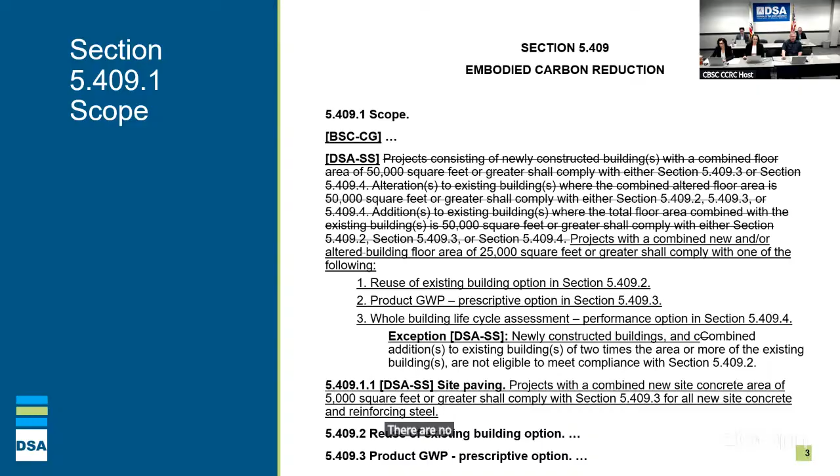There are no other hands raised. Moving on to table 5.409.3, this table presents the proposed adjustments to the GWP limits.

Under this proposal, the limits would be reduced from 175% down to 125% of the BCCA and NRMCA levels. I also want to note that these updated limits would be based on the 2025 BCCA values, whereas the current limits reference the 2022 BCCA values.

This proposed reduction to 125% is consistent with the proposal previously brought forward during the pre-cycle CCRC meetings in the 2025 intervening code cycle. That proposal was ultimately tabled following the passage of AB 130, delaying further consideration until the 2027 Triennial code cycle. Given this history and the later timing of the upcoming code adjustments, DSA is requesting feedback from stakeholders regarding the appropriate level of reduction moving forward.

Are there any comments on the prescriptive GWP limits at this time? If I could interject, we're going to have a public comment period towards the end of the presentation after the stakeholder presentations, so maybe we can hold off on public comments until then, per the agenda. Okay, just so the whole presentation is in front of them before they ask questions.

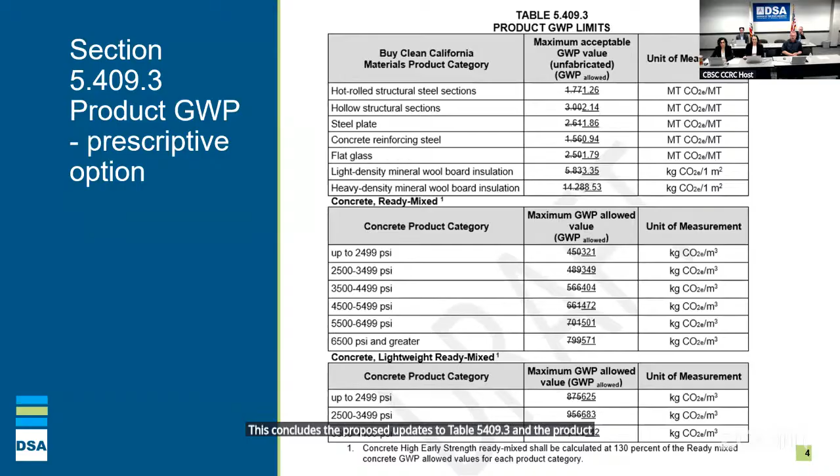Next is section 5.409.3.1, verification of compliance. DSA is proposing an exception that for DSA projects, the required DSA form for prescriptive compliance shall be submitted in place of worksheet WS5. This is because DSA has its own verification form included with the DSA 403C, and that form is required for all DSA regulated projects. As a result, worksheet WS5 in CalGreen is not used for DSA projects.

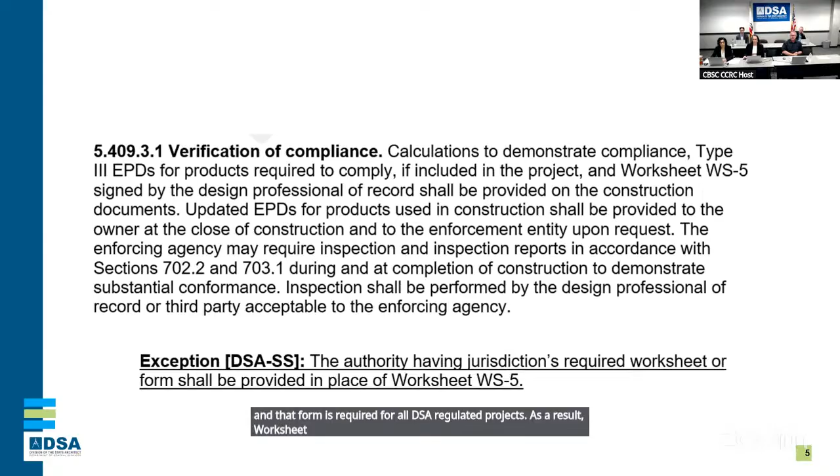Section 5.409.4 covers the whole building life cycle assessment performance option. The proposed revisions introduce a carbon budget as an additional pathway alongside the current baseline building method. The upcoming presentation by CLF will provide a more in-depth explanation of the carbon budget. As a note, DSA is seeking feedback on whether the carbon budget approach should eventually become the sole compliance method within the performance option, either in this code cycle or in a future one. This is an open question for stakeholders, and your input will help shape the direction of upcoming updates.

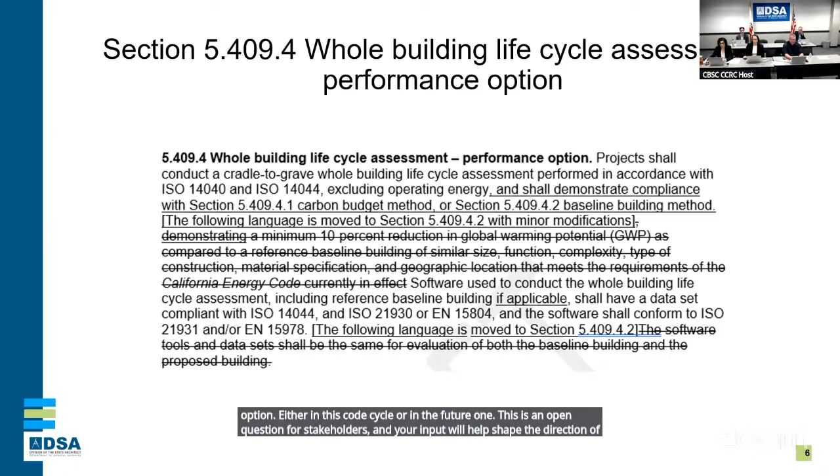Regarding the carbon budget, on the screen is a snippet showing how it is proposed to be integrated into the code language. Section 5.409.4.1 outlines the requirements for the carbon budget method, explaining how the embodied carbon intensity, ECI, is calculated, and introduces table 5.409.4.1, which lists the maximum acceptable embodied carbon budgets for each occupancy type.

You'll also notice that a significant portion of table 5.409.4.1, shown in red, has been revised since the draft posted on the BSC and DSA websites prior to the CCRC meeting. These updates were made in response to CLF comments submitted during the 2025 intervening code cycle. CLF emphasized that project teams should not perform an area-weighted average to determine a project's embodied carbon budget, nor should they combine multiple occupancy groups, because these embodied carbon budgets are already based on accounting for mixed-use types.

To address that concern, DSA proposes expanding the table to list each non-residential occupancy group separately and adding two footnotes. Footnote 1 clarifies that the primary occupancy group is the occupancy classification representing the largest percentage of the building's total floor area. Footnote 2 clarifies that a building's embodied carbon budget must be the embodied carbon budget associated with its primary occupancy group and must not be calculated using an area-weighted average of multiple occupancies.

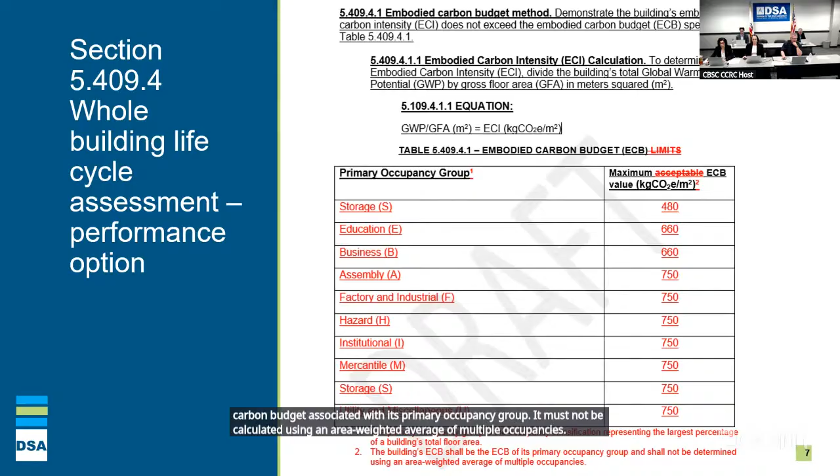We also have proposed new definitions for embodied carbon intensity and embodied carbon budget. I'll walk through each of these briefly. Embodied carbon intensity, ECI, is defined as the total global warming potential of a building divided by its gross floor area, expressed in kilograms of carbon dioxide equivalent per square meter. Embodied carbon budget, ECB, is defined as an embodied carbon intensity value that serves as the maximum allowable limit for determining a project's compliance with embodied carbon reduction requirements, also expressed in kilograms of carbon dioxide equivalent per square meter. These definitions support the carbon budget framework, which again will be explained in greater detail during the upcoming CLF presentation.

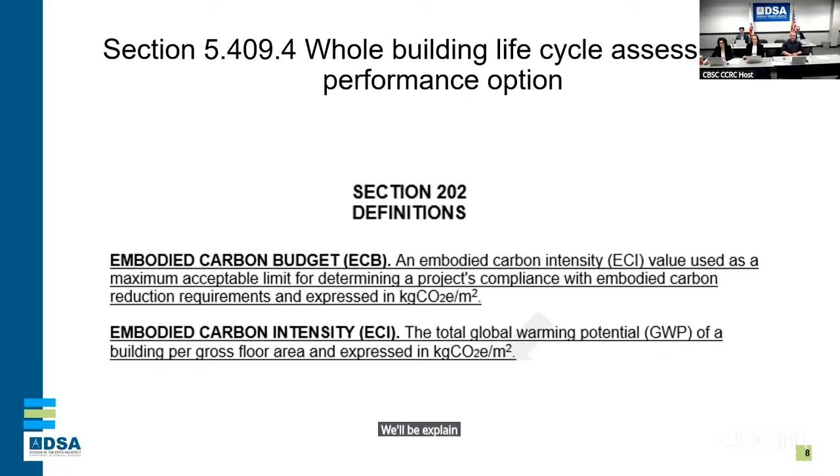And with the addition of the carbon budget, the baseline building method has been separated out into its own section, 5.409.4.2, which retains most of the existing language with only minor updates for clarity.

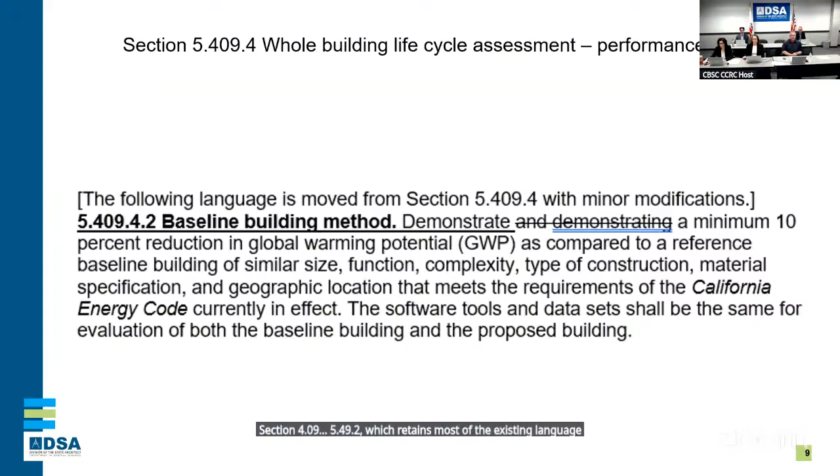Also within the whole building life cycle assessment performance option, DSA is proposing an exception to exclude biogenic carbon from the calculation. Stakeholders recommended clarification to ensure biogenic carbon is not counted as a reduction in the building's GWP, nor the base building model where applicable. The rationale is that biogenic carbon has a net zero contribution to global warming potential over the full life cycle of a building.

The proposed definition for biogenic carbon is greenhouse gas absorbed from the atmosphere by living organisms as they grow, and then released back into the atmosphere through natural processes such as decomposition, but not fossilized or derived from fossil resources.

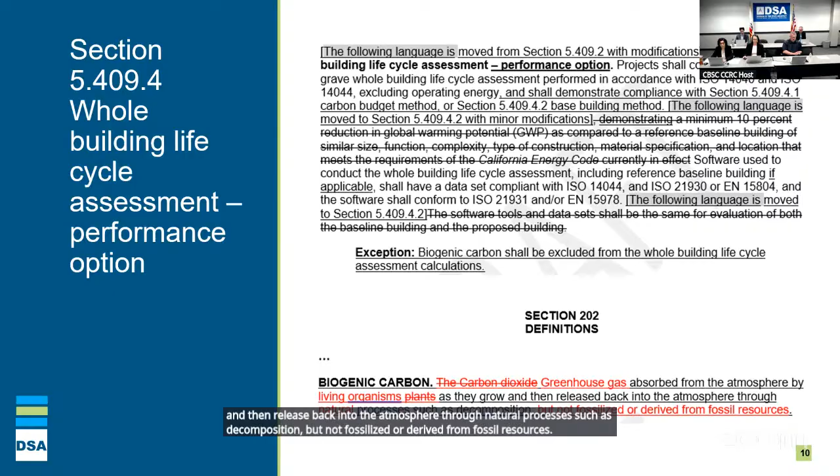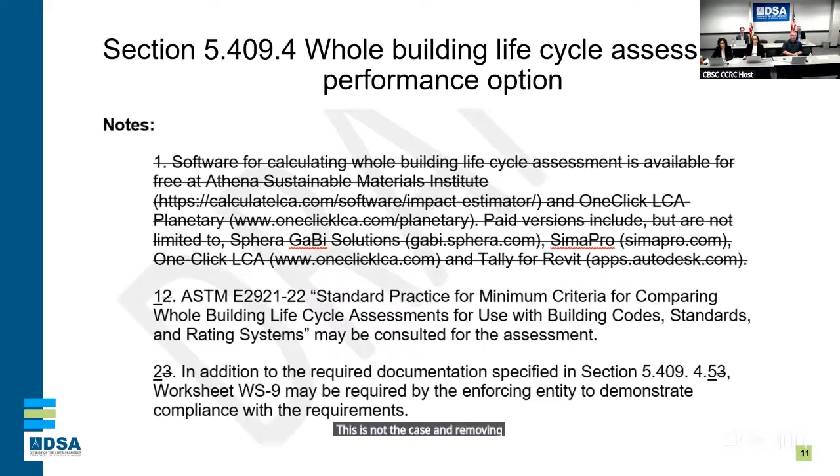Again, in section 5.409.4, DSA and BSC are proposing to remove note 1, which lists whole building life cycle assessment software available to the public. Although the note is non-regulatory, keeping it in the code text could unintentionally imply that the authority having jurisdiction endorses, has evaluated, or prefers the listed software over other tools on the market. This is not the case, and removing the note avoids any misunderstanding or perception of bias.

In section 5.409.4.3, building components, we are proposing a new subsection 5.409.4.3.1, which specifies that salvage materials and products shall have a GWP of 0 for life cycle stages A1 through A3. In other words, salvage materials do not contribute to the building's overall GWP calculation for those stages. This subsection also clarifies what qualifies as a salvage material, using criteria similar to the exception that will be included in the prescriptive option for the 2025 intermediate code.

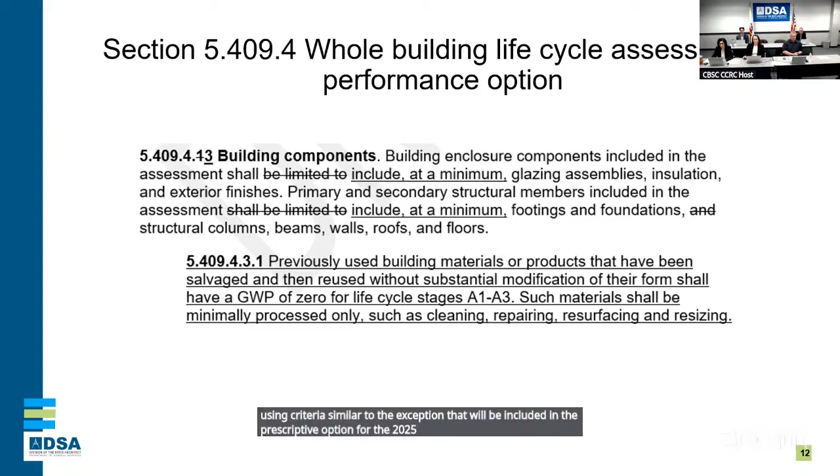Lastly, similar to the verification exception in the prescriptive method, DSA is proposing an exception in section 5.409.4.5 for verification of compliance. For DSA projects, the required DSA form must be submitted in place of worksheet WS4. This is because DSA already has its own verification form, including the DSA 403C form, and that form is required for all DSA regulated projects. As a result, worksheet WS4 in CalGreen is not used for DSA projects.

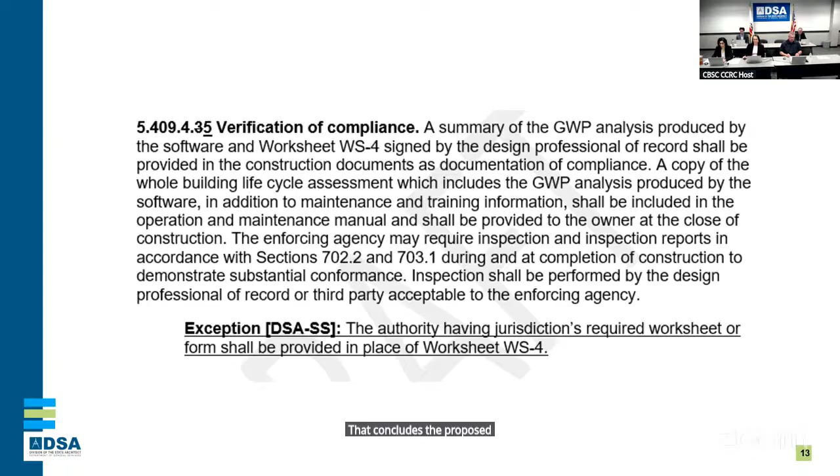That concludes the proposed updates for the whole building life cycle assessment performance option. And for that, I'll turn this back over to BSC. Thank you, Anna.

As DSA just presented, and as everyone can see in BSC's draft express terms, BSC does not propose any changes to the scoping provisions for embodied carbon regulations under our authority, and the threshold will stay at 50,000 feet for buildings within this authority. We're co-adopting the rest of DSA's proposals, again, except for the scoping provision changes and exceptions about worksheets that DSA proposes on their own.

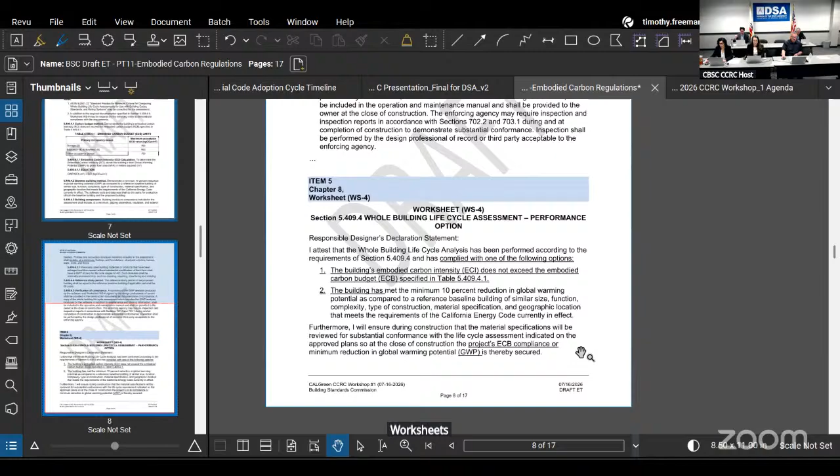I'll go ahead and present BSC proposals in voluntary sections that BSC or DSA does not adopt. As DSA had mentioned in their presentation, they have worksheets specific to their projects and will no longer be co-adopting the worksheets in Chapter 8 of CalGreen. Worksheets WS4, WS7, and WS9 are to be used with the mandatory provisions as well as the voluntary appendices. Each of these forms have been revised to reflect the embodied carbon budget compliance method.

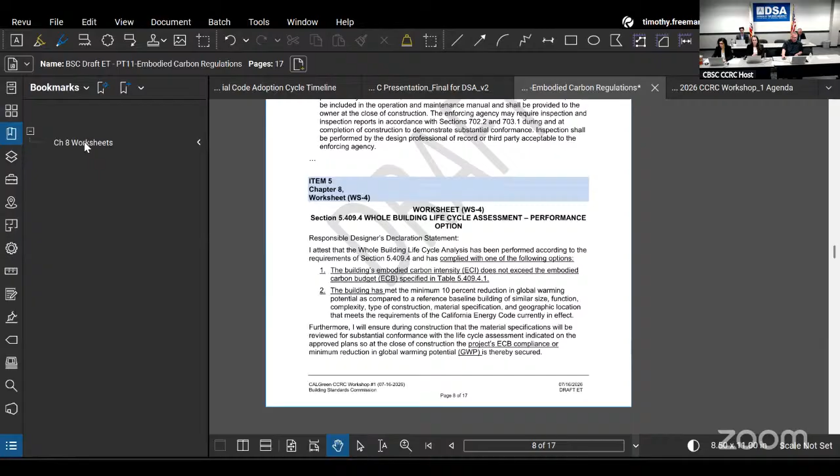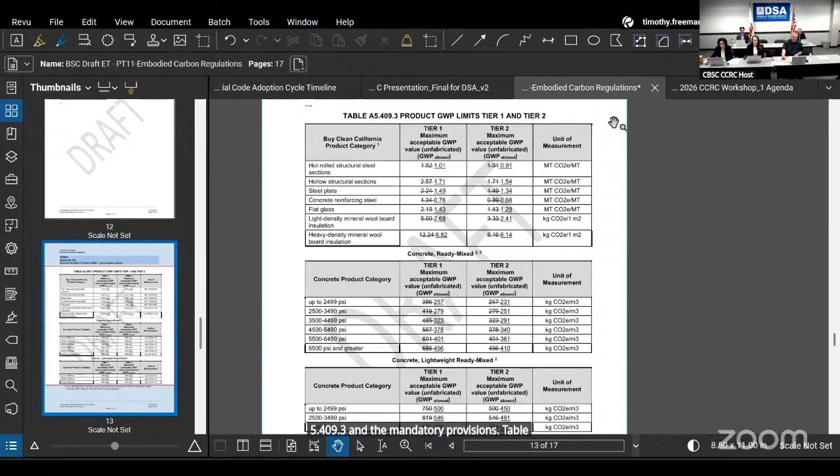Similar to table 5.409.3 in the mandatory provisions, Table A 5.409.3 in Appendix A5 has been adjusted to reflect utilization of BCCA GWP values for Tier 1 and Tier 2 voluntary measures. Tier 1 utilizes 100% of BCCA values, while Tier 2 uses 90% of the values.

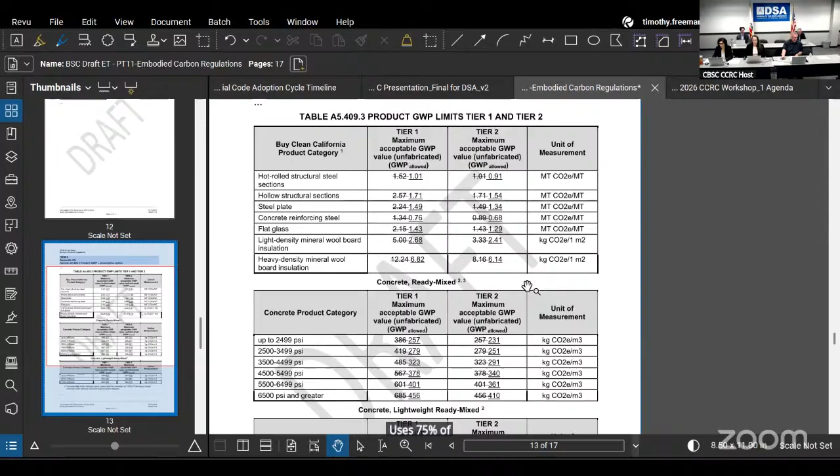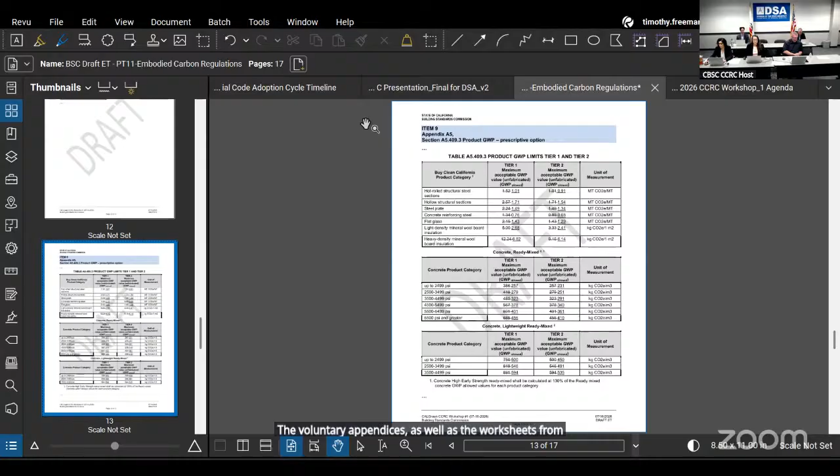That's the extent of provisions being proposed in the voluntary appendices as well as the worksheets from BSC. At this point, I'd like to continue to agenda item 3. DGS procurement has an update on BCCA levels.

Is somebody from procurement, yeah, I think it's Tony Wang, on the Zoom? Okay. Yep, can you guys hear me? Yeah, thank you, Tony, morning. I am working on sharing my screen.

All right, good morning everyone. My name is Tony Wang. I am the Senior Procurement Engineer with Department of General Services Procurement. I oversee the Environmentally Preferable Purchasing Unit, and so we work on the Buy Clean California Act as well.

So what is the Buy Clean California Act? The Buy Clean, or BCCA, states the Department of General Services, in consultation with the California Air Resources Board, is required to establish and publish the maximum acceptable global warming potential limits for 4 eligible materials. Those materials are structural steels, concrete reinforcing steel, also known as rebar, flat glass, and insulation. These limits apply to any projects conducted by a state department that is under the State Contracting Act. On the right, I've included the current GWP limits that were released January 1st of 2025. These limits are reviewed on a 3-year cycle, so we are due to update these limits on January 1st of 2028.

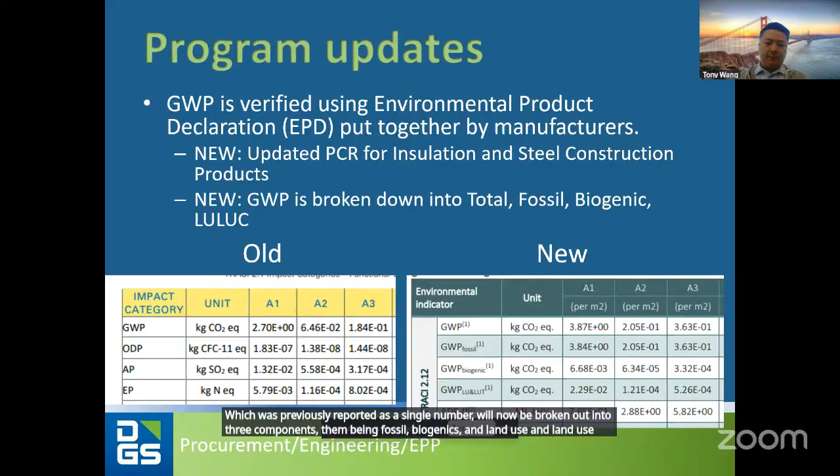In addition to those changes, we also had a change to the BCCA legislation. Previously we were only allowed to set limits for mineral wool board. This has been changed to a much broader insulation category. We're currently working on collecting data to set the new limits across a much larger product category, and we're planning on releasing that on the next update cycle on January 1st of 2028.

There's quite a few considerations that go into setting these limits. One is that with the recent PCR changes, a lot of the EPDs will be reporting cradle to grave instead of cradle to gate. Just within the insulation category, there's a lot of variation in the products, so we need a strategy for addressing differences in the GWP of facers, different densities of insulation, form factors, etc., as well as the PCR being reported in the EPDs.

Those are technically active for 10 years, so we want to make sure whatever limits we set account for both the PCR the EPD was written on and any new EPDs that come out written on a newer PCR. So that's the update for us on the BCCA program.

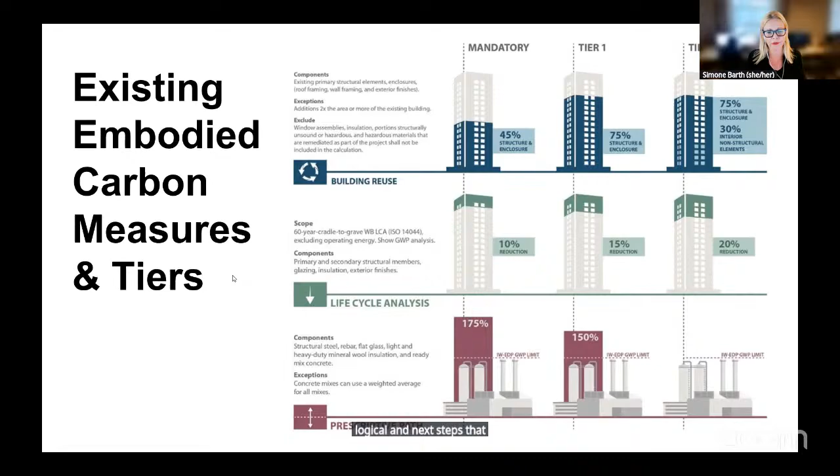So when we're talking about the triennial update, we like to suggest logical next steps that support the state of California's overall goals in reducing greenhouse gas emissions. We think the 2024 measures were successful, and the industry adopted it based on feedback received. The success was in the choice offered to the design professional—the 3 compliance paths—as well as the fact the requirements were relatively achievable. So this is an interesting point to continue our journey towards reducing overall greenhouse gas emissions, but also creating resilient and sustainable buildings.

Our recommendations are organized in 4 categories today that will be presented by our subject matter experts. Number 1 is embodied carbon compliance and potential adjustments to the prescriptive path. Number 2 is introducing an embodied carbon budget as an alternative compliance method. To be clear, we are not changing the 3-path model approach—this is just an alternate.

Number 3 is the circular economy, getting CalGreen up to date and supporting the overall reduction of greenhouse gas emissions and waste, while also promoting economy. And last but not least, there's a slight typo here, is CalGreen cleanup—as we add more materials, we think it's important to prune the tree and make fine revisions. With this, I'd like to introduce our subject matter experts who will go into detail on these 4 recommendation areas, and I'll call up Maya White to cover embodied carbon compliance.

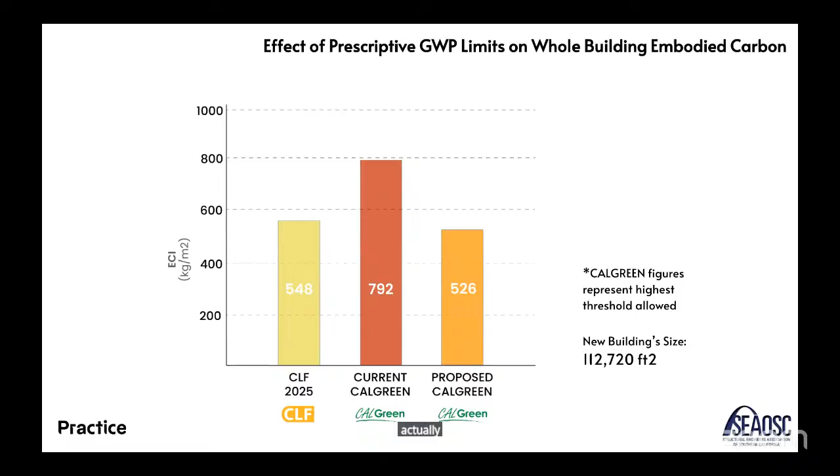So here are the actual GWP limits that we're proposing for the mandatory tier 1 and tier 2 levels: 100%, 90%, and 85%. It's broken down by each material type per BCCA. As insulation expands beyond mineral wool, we'd also advocate expanding standards for the prescriptive path limitations to align with the different categories included for insulation.

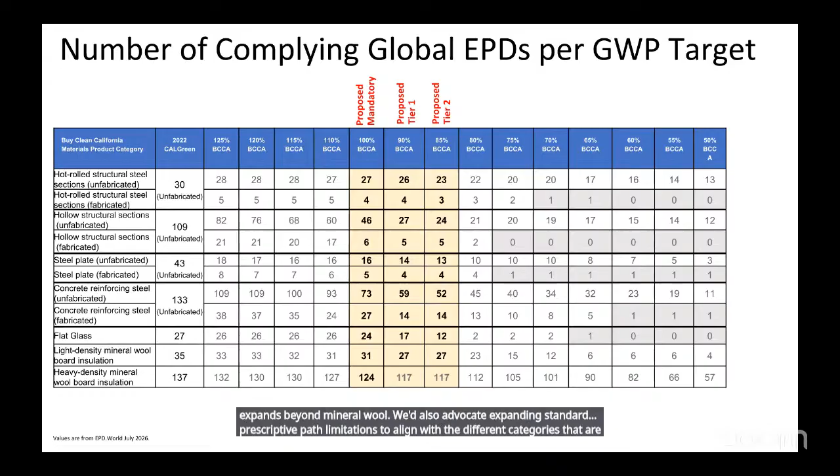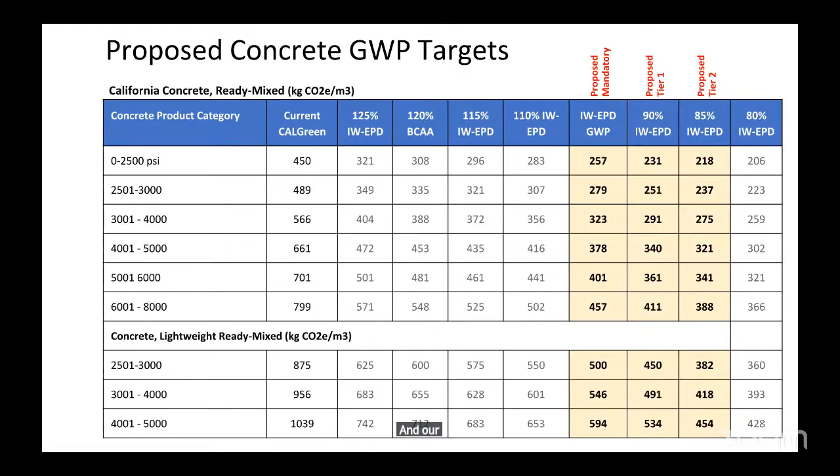Next slide. Here you can also see that we are proposing limitations on concrete that are in correspondence with average concrete values as shown in CLF reports and also in our NRMCA standards. Again, 100%, 90%, and 85% for mandatory tier 1 and tier 2. Next slide, please.

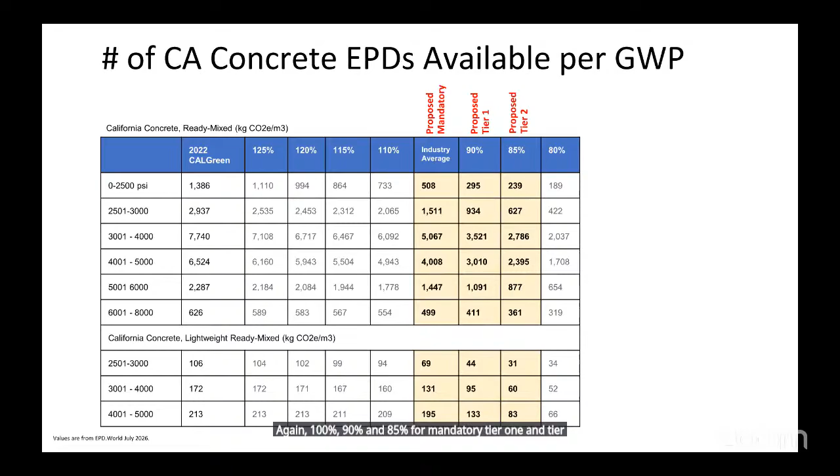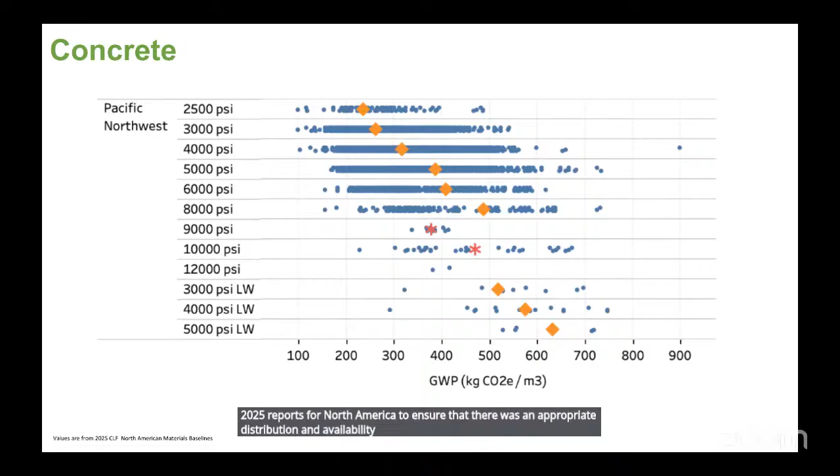We looked at each material type and compared it to CLF's 2025 reports for North America to ensure there was an appropriate distribution and availability of EPDs on the marketplace that consumers, architects, and contractors could turn to for material supplies. We found there was a more than adequate distribution for each product type.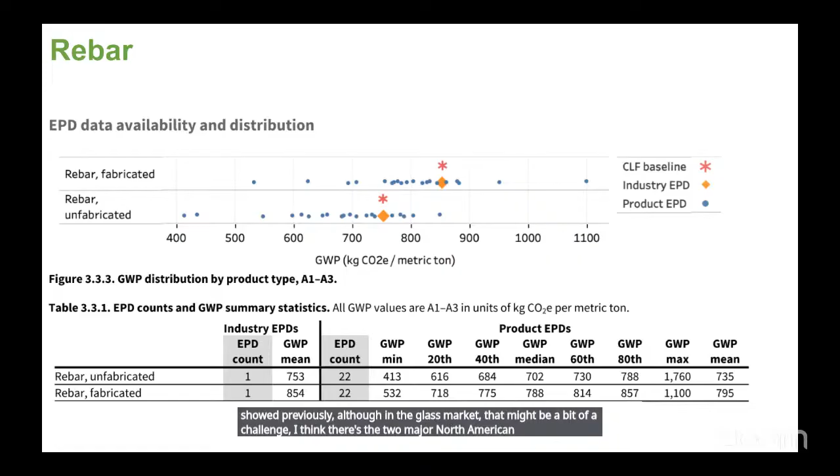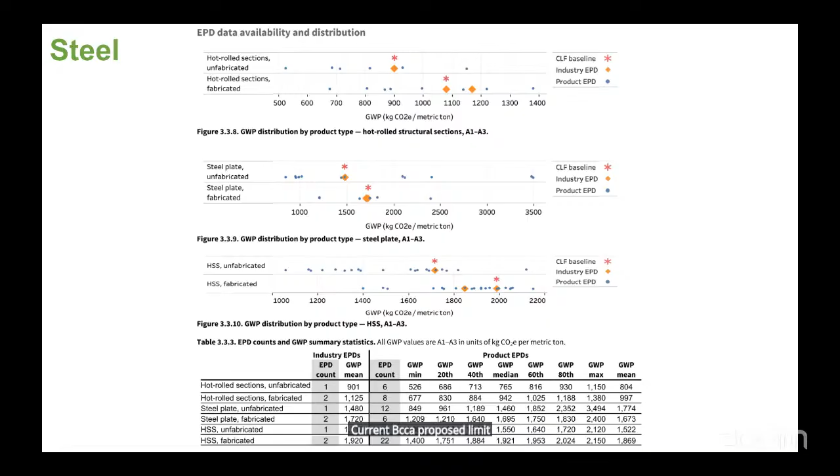We support going to 75%, I think, for tier 2, as BSC showed previously, although in the glass market that might be a bit of a challenge. The two major North American suppliers come out at about 87% of the current BCCA proposed limitation. So for that, we made a minor deviation on glass to allow the two major manufacturers to still be considered.

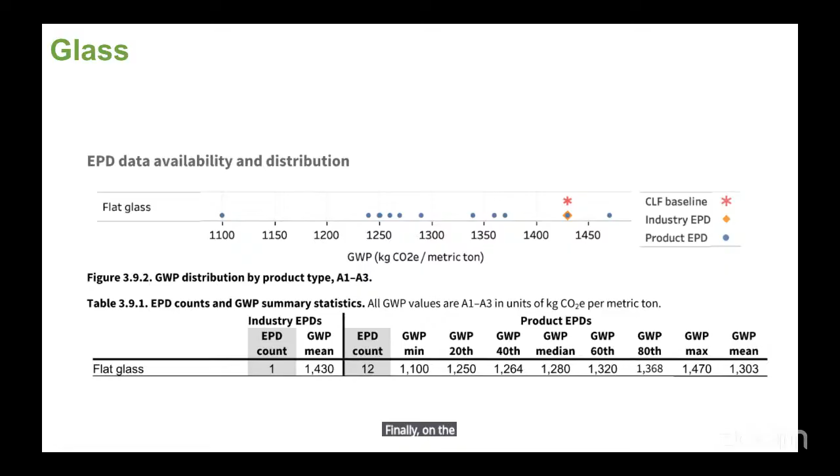Next is Brad Benke with the Carbon Leadership Forum.

I'll be sharing some of our proposed approach for the embodied carbon budget pathway that's been mentioned a couple times already. So there are 3 current pathways: the building reuse pathway, where you simply show you've reused 45% or more of a building; the prescriptive path, where you're using lower carbon products verified by EPDs; and the current performance path, which has you conduct a whole building life cycle assessment on both a baseline and proposed design to show a percent reduction.

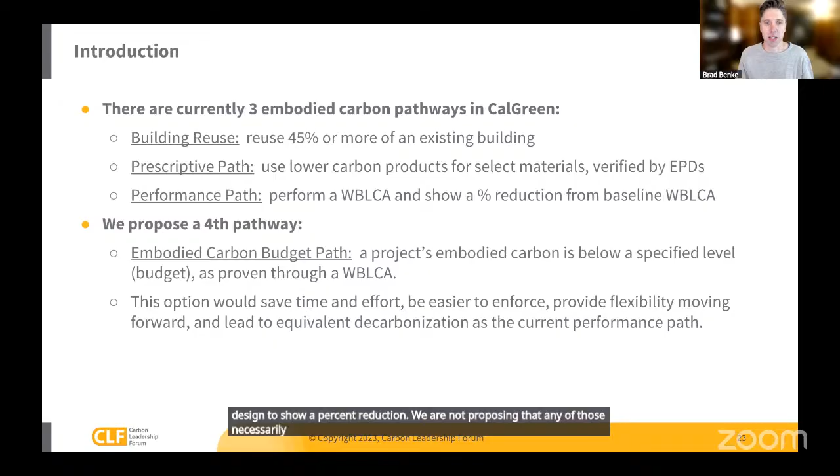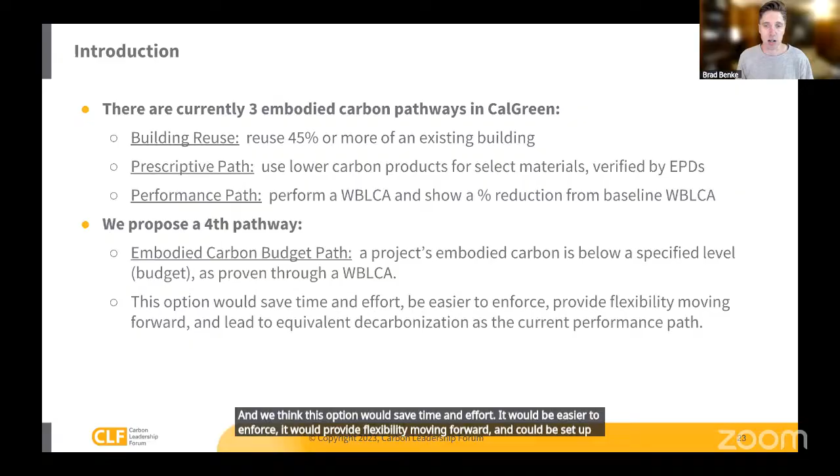We are not proposing that any of those necessarily need to change, but we are introducing a 4th optional pathway called the embodied carbon budget approach. This would be where a project's embodied carbon intensity must be below a specified level or budget as proven through a whole building LCA. We think this option would save time and effort, be easier to enforce, provide flexibility moving forward, and could still lead to equivalent decarbonization as the current performance path. Next slide, please.

So embodied carbon budget is a maximum allowable embodied carbon threshold value for compliance. Typically, this is expressed as an embodied carbon intensity of a building, measured in units of kilograms of CO2e per meter squared.

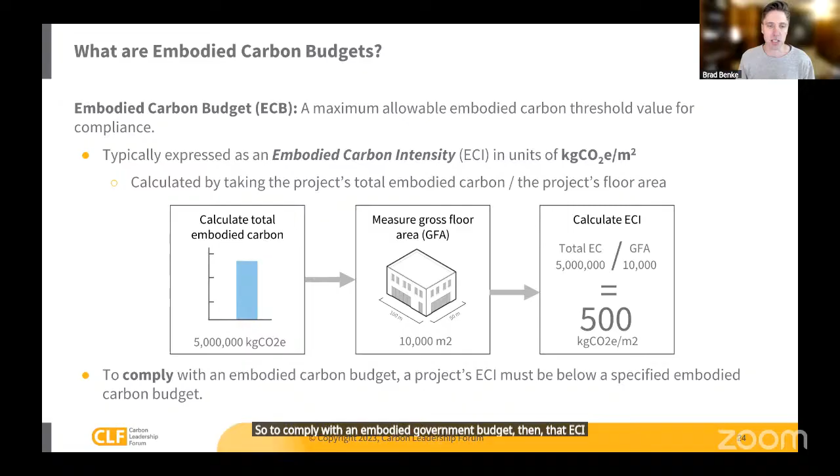So how you actually calculate this embodied carbon intensity metric is you perform a whole building life cycle assessment on your project, find out its total cumulative embodied carbon impacts, measure the floor area of that same project, and divide those two numbers. So in this case, 5 million divided by 10,000 would be 500 kilograms CO2e per meter squared, or ECI building. To comply with an embodied carbon budget, that ECI number must be below a specified budget.

How this would actually work is a project would calculate their ECI and compare it to a predetermined budget that we have suggested values for in the following slides, and see if they already comply, or if they must reduce their impacts in order to comply.

So in this case, buildings A, C, D, and F all calculated their ECI, and it was below whatever the set value is. Whereas projects B and E looked at their results and said, we need to reduce our embodied carbon further to meet this target.

By doing so, those projects that are over the embodied carbon budget and make reductions to meet it are then creating a net embodied carbon reduction across the policy across California.

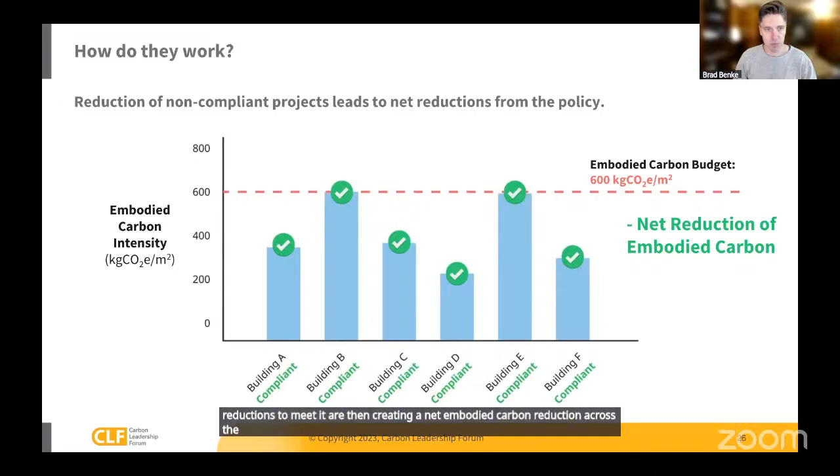The benefits of this option are simple. In the current performance path or baseline design approach, project teams have to create two different whole building life cycle assessments, one a hypothetical baseline, the other their actual proposed building, and show that the proposed building is lower than the baseline. We completely eliminate the need to create that baseline whole building life cycle assessment model, which saves everybody time and money and is much easier to review.

This also helps because if projects already have mid to low impacts inherently, whether they've intentionally or accidentally created a lower carbon building, they're not required to reduce those impacts any further.

It's also clear and predictable. Project teams can know exactly what the embodied carbon budget value is that they need to meet early on in design, and the method itself does not need to change over time, saving on training and retraining.

However, it's also flexible and forward-looking. Once you have this framework in place, if you would like to make these targets more restrictive over time, it's easy to adjust them to align with whatever global climate targets, state climate targets, or code adoption climate targets might exist.

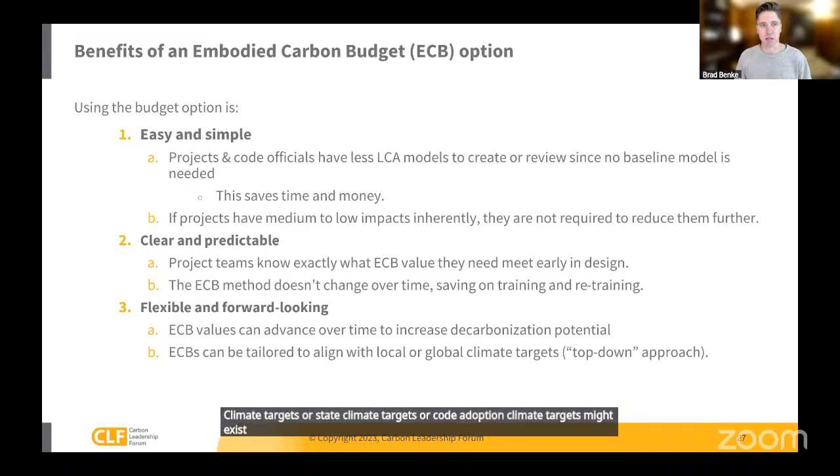The data that we're using to create values for the CalGreen recommendation comes from our whole building life cycle assessment benchmarking study that we completed last year in collaboration with the University of Washington. This had over 200 whole building LCAs of real world projects from late design to construction. We had rigorous modeling and reporting requirements and data quality assurance checks, and it's the largest and actually the only database containing comprehensive and high resolution whole building life cycle assessment results of real world projects in North America.

This data set was not available when CalGreen introduced the embodied carbon pathways in 2024, which is why it's now being introduced as an option, because we did not have sufficient data to be able to say what accurate or meaningful embodied carbon budgets would have been for those projects at that time, but we do now.

The way we're proposing that different types of buildings have different embodied carbon thresholds or budgets is based on primary occupancy category, which is the occupancy type that makes up the greatest share of a project's total gross floor area. Primary occupancy is recorded on all architectural drawings submitted for code, so this is an easy way for code officials to pair appropriate embodied carbon budget targets with the building typology.

The values that we're proposing at the required level are the 75th percentile of the data points for projects of equivalent types. More on that in the next slide. Tier 1 and tier 2 values can also be introduced to align with the baseline design pathway reduction potentials, and we have a methodology for doing so.

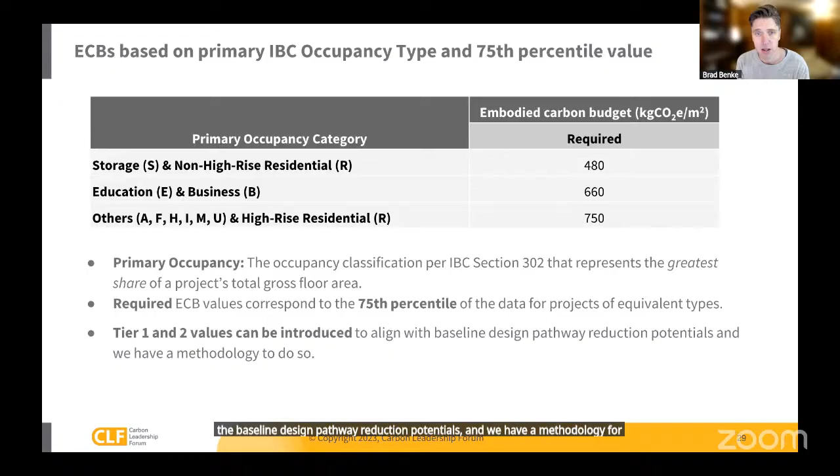So the 75th percentile, the way we chose that number is: if you were to quantify all the projects in our data set and say what would happen to each of these projects' embodied carbon intensity if we were to cap it at a certain value, where ones higher than that value have to reach it, and ones already below stay the same, we found that the 75th percentile of the data set creates an almost exact equivalent total net reduction of those projects as the current 10% reduction for the baseline design approach.

As indicated here, there's also potential tier 1 and tier 2 values where we can closely match a 15% and 20% reduction as needed for additional values. Also worth pointing out, the 75th percentile means 75% of projects on average are already going to be below that threshold. So we think it's helpful to consider that certain people adopting this option might want to make it more stringent, and we could provide values for that.

Also, no matter what the performance path reduction is set to, if the baseline design performance path values were to change, we can create similar outcome reduction targets using this data set.

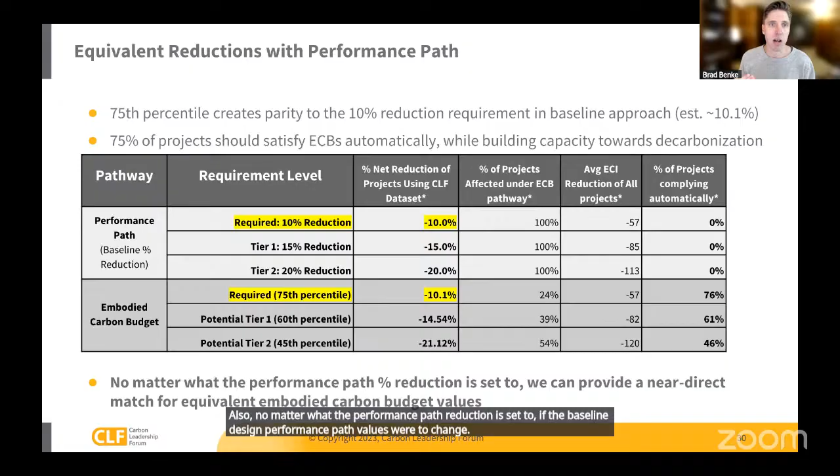To summarize, we think these recommendations are appropriate because they align with the intent and application of the current performance pathway. They utilize the best available data for embodied carbon impacts of projects in North America. This incentivizes net decarbonization in parity with the current baseline design approach. They're achievable with minimal effort for the majority of projects, easy to understand and verify for both project teams and code officials, saving time, effort, and money compared to the baseline design approach. Lastly, these can easily be updated and improved over time without changing the overall process or framework, and this does not replace any current pathway, just adds flexibility and ease.

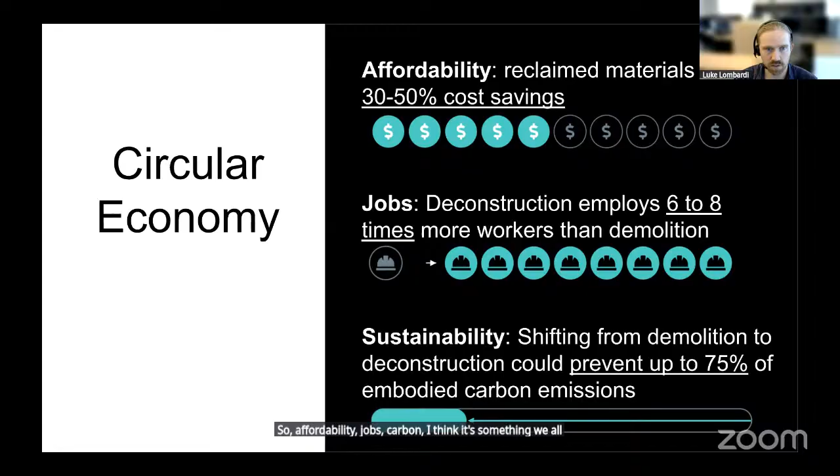Next slide. And we're seeing this develop with policies across the country, so it's not a novel idea here. You can see mandated deconstruction in places like Boulder or San Antonio, deconstruction or salvage audits in New York City guidance, Washington State allows lumber reuse, and ICC has recently brought reused lumber into the code for 2027. So there's a lot of precedent - the point is that we can pull from and set best practice here in California.

So what we are recommending is really in three groups here. First is foundational, where we want to add some definitions to enable or make consistent some of the other recommendations. We have some clarifications that we want to make clear within the prescriptive and performance pathways that enable reclaimed or reused materials. And then we have some broader discussion topic items around what precedents we can pull from across the country that could be good starting points for our own REACH code. So we'll get into that.

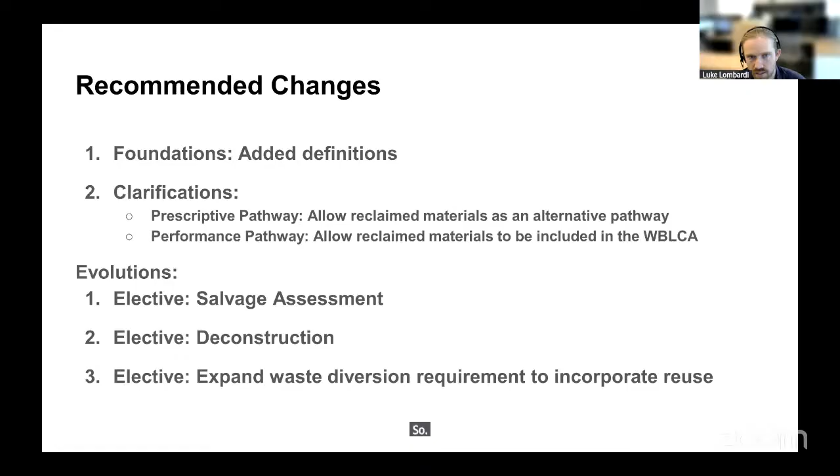Next slide. First off, with the definitions, I think there's not too much to be debated here. There's plenty of precedent to pull from now, from groups like LEED or ISO or other standards. There's sometimes conflated terms in the circular economy sphere around reuse or recycling and what we're defining, so it's important that we get these documented and written down so people are working from the same definitions.

Simone, looks like it froze on my end. My apologies, just give me a moment please. Sorry. I can dive into it just to keep things rolling here.

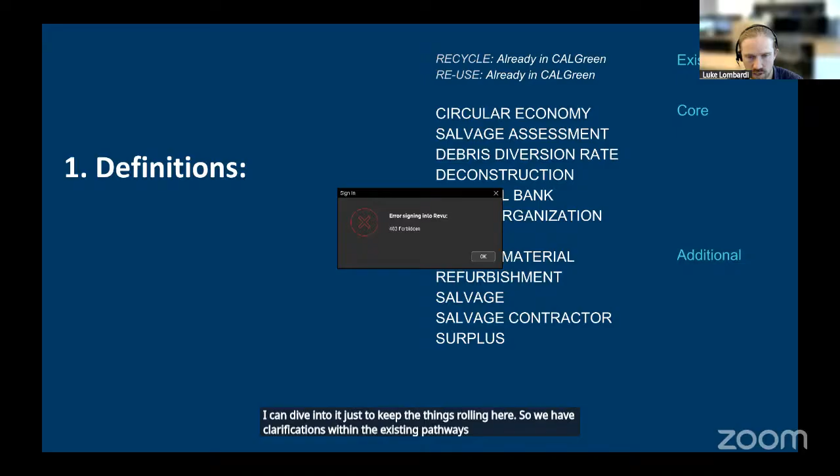So we have clarifications within the existing pathways for allowing salvaged materials. The pitch around this is thinking of salvage as sort of near zero carbon. This is certainly not, in fact, the true definition - there's a heavy asterisk around this because there are still carbon emissions whenever we have to transport or remanufacture things, but we know them to be, generally as a first principle, lower than new materials.

So the idea being, in the prescriptive path we waive the EPD requirement, and in the performance whole building LCA, we allow for omission of manufacturing emissions for A1 through A3 as a simplification, while there's some lag time for data around reused material EPDs to develop. So still incentivizing this pathway and not holding it up because of some technicalities.

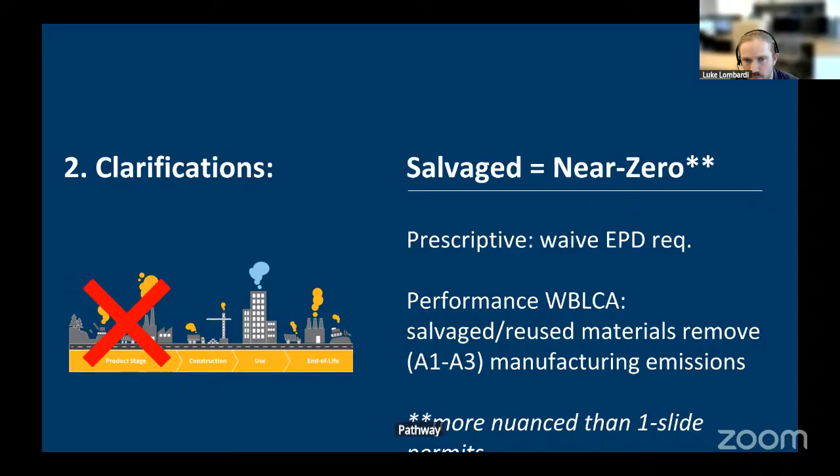So the last three here are just as a starting point. The first is recommending a salvage audit. This is something that has started to be required at the municipality level in certain places, where effectively you walk the building site that's being demolished and catalog the products that are available. The idea is you can make these public so they could be reclaimed or used. It's a first step to know what materials are being demolished or could be made available. Critical to this is the documentation piece and making a visible reuse market, but it stops short of requiring deconstruction.

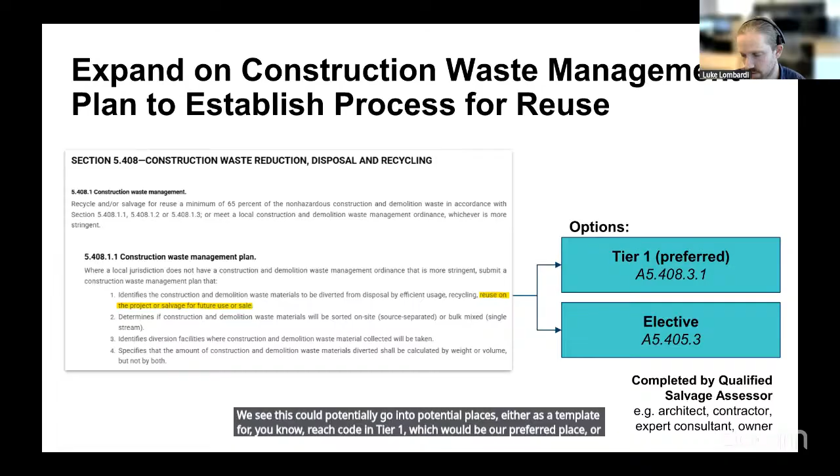So next step, we see this could potentially go into reach code in tier 1, which would be our preferred place, or as an elective, which would make it optional at any time.

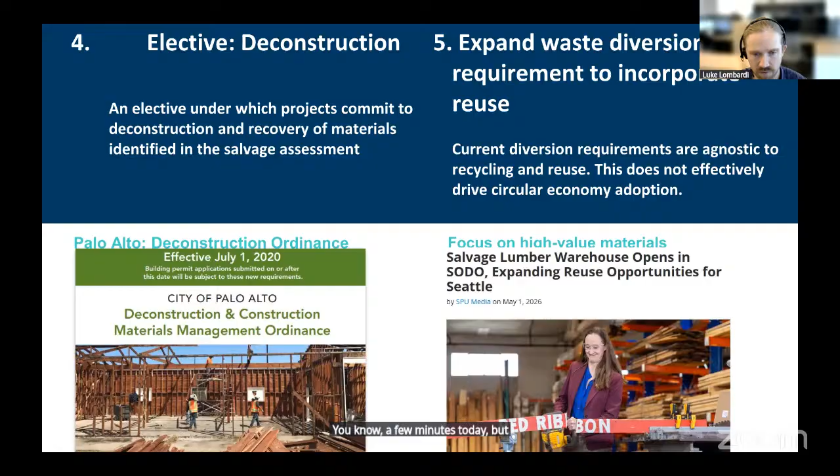Next slide, I'll hop to the second recommendation, which is the next progression of this. Once we establish the materials that could be deconstructed, the two things we want to do in parallel are actually require some deconstruction — there's precedent set at the local level — but it's important not just to drive the supply of those materials, but also the demand. So we're recommending an expansion of waste diversion to discern between reuse and recycling rather than be agnostic. There's a lot to discuss here, more than we have time for today, but that's a starting point.

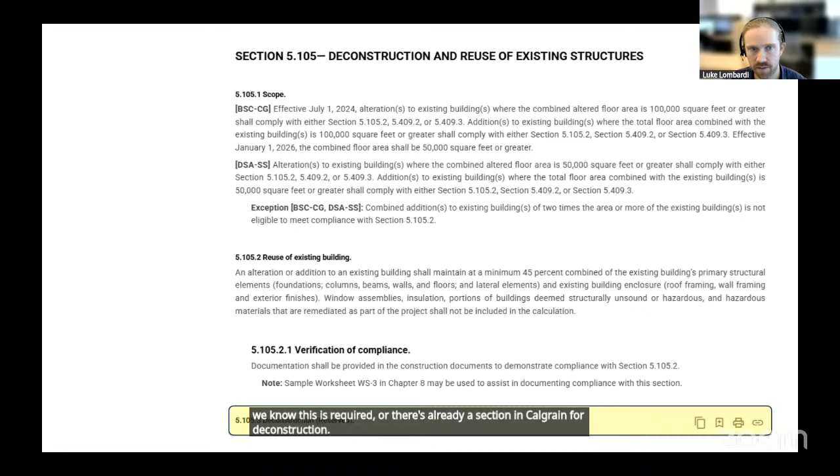I think we know this is required—there's already a section in CalGreen for deconstruction. We're just imploring the group to start that process. And I think that's it.

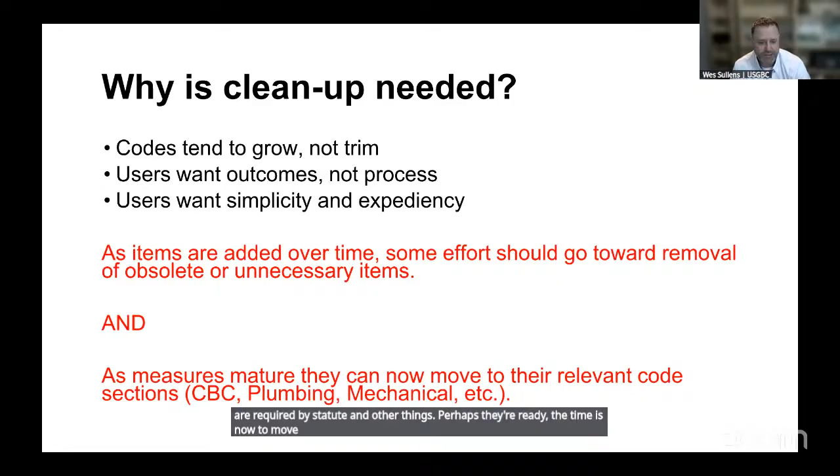So as items are added over time, we think there should be an effort to trim obsolete or unnecessary items, as well as measures that are now mature and required by statute and other things. Perhaps the time is now to move them to other code sections where they might be more relevant, such as the California Building Code, plumbing, etc. This is not a backtracking — we're not saying cut these things out of the codes at all. On the contrary, it's making space for newer high priority items, especially around embodied carbon, and we can make room for some of these urgently needed updates by refreshing CalGreen.

I see in the last intervening code cycle that there's already a little bit of this work done, which is great — we're happy to work with you on more. There are some examples on screen of things we might consider simplifying or streamlining, and again moving things to other code sections if possible, like water conservation fixtures to the plumbing code, and filter requirements to the mechanical code, etc.

And we have a table of some suggested things. We're going to refine this into a top 10 or 15 list, and would love to work with the state agencies on these priorities for making room in the code for these great embodied carbon updates. That's it for me.

Thank you, Wes, and thanks to my fellow co-presenters. Just a quick reminder of our four recommendations: adjustment to the prescriptive path in the embodied carbon compliance, introducing the embodied carbon budget as an alternative, introducing circular economy, and the CalGreen cleanup. And with this, I'd like to hand it back and open it up for questions. Thank you.

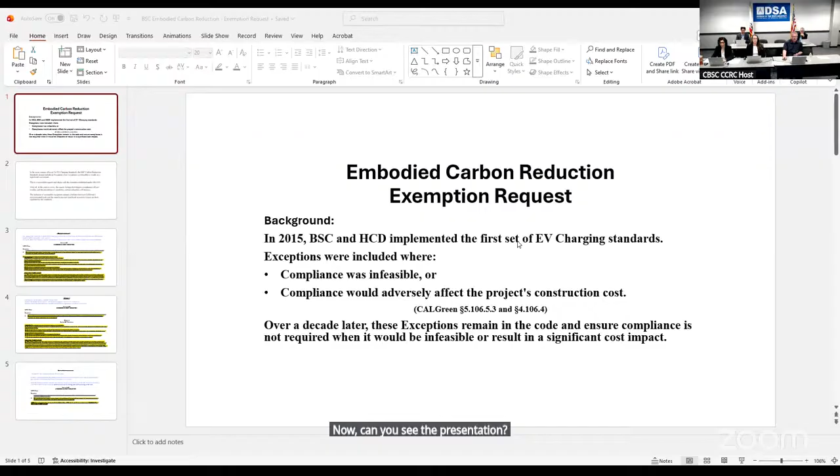Okay, by way of introduction, I'm Bob Raymer. I'm representing the Industry Coalition, made up of 4 associations: the California Building Industry Association, the California Apartment Association, the Building Owners and Managers Association, and the Business Properties Association.

What we're asking for here is an embodied carbon reduction exemption request. It may not be all that important right now, but down the road, it certainly will become important.

By way of background, AB 1092 was the Levine legislation that required both the Building Standards Commission and HCD to develop and implement the first set of EV charging regs. Those took effect in 2015, I believe in July, and they included exceptions for when compliance was infeasible or when compliance would adversely affect the project's construction cost.

Over a decade later, these exemptions still remain in the code and ensure compliance is not required when it would be infeasible or result in significant cost impact.

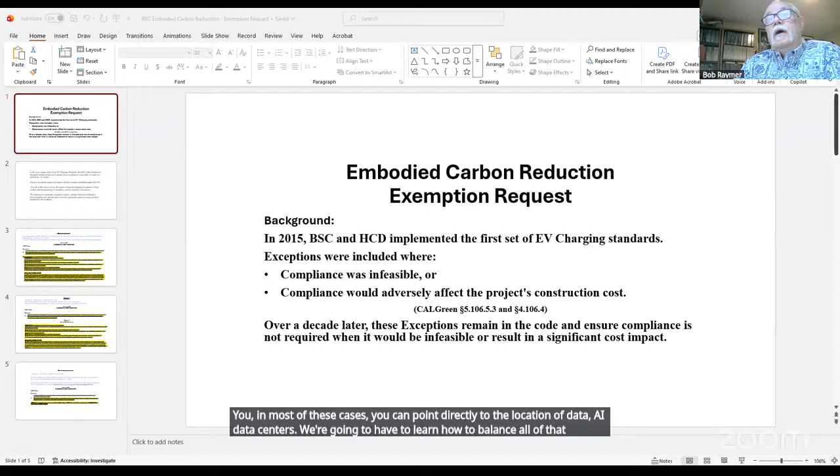I'd like to point out that initially, when HCD had the 3% rule, where 3% of multifamily parking spaces had to comply, this wasn't used, quite frankly. However, now that we're effectively at a 100% level for multifamily, we are running into instances where the local jurisdiction cannot supply capacity. In most of these cases, you can point directly to the location of AI data centers. We're going to have to learn how to balance all of that stuff out. But down the road, 10 years later, it was important that they were there.

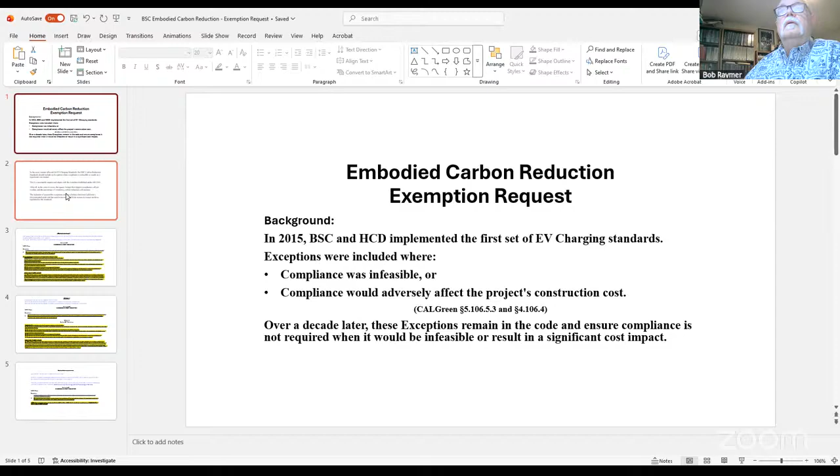In the same manner allowed for EV charging stations, we feel the BSC carbon reduction standard should include an exception, once again, when compliance is infeasible or would result in significant cost impact.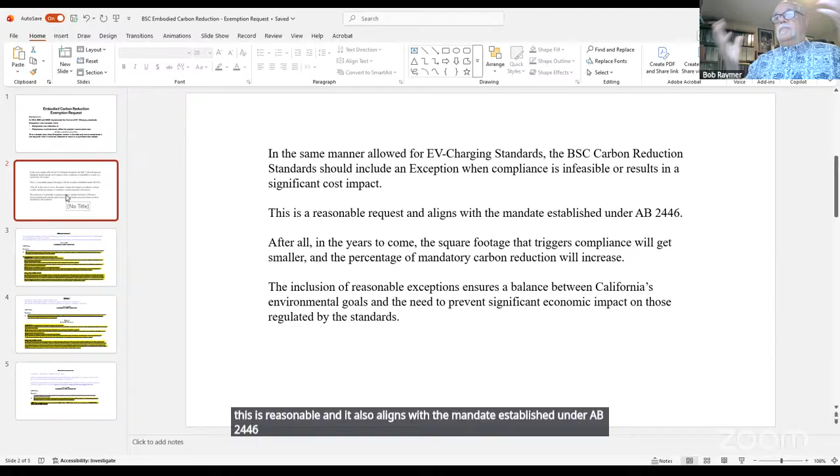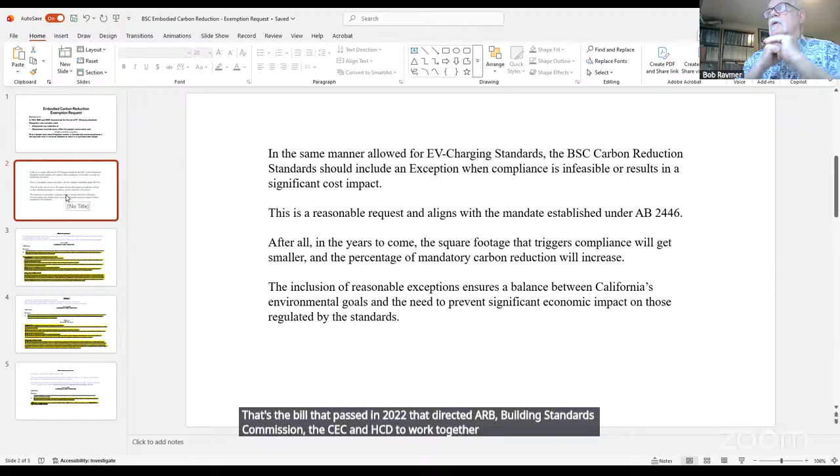We feel this is reasonable and it also aligns with the mandate established under AB 2446, the bill that passed in 2022 that directed ARB, the Building Standards Commission, the CEC and HCD to work together to come up with a framework for doing what we're doing.

In years to come, we feel that the square footage trigger for embodied carbon reduction is going to get smaller. Right now it's at 50,000, down from 100,000, and it's probably going to get lowered further, just as the percentage of mandatory carbon reduction is most likely going to increase. So we feel the inclusion of reasonable exceptions ensures the balance between California's environmental goal and the need to prevent a significant economic impact on those regulated.

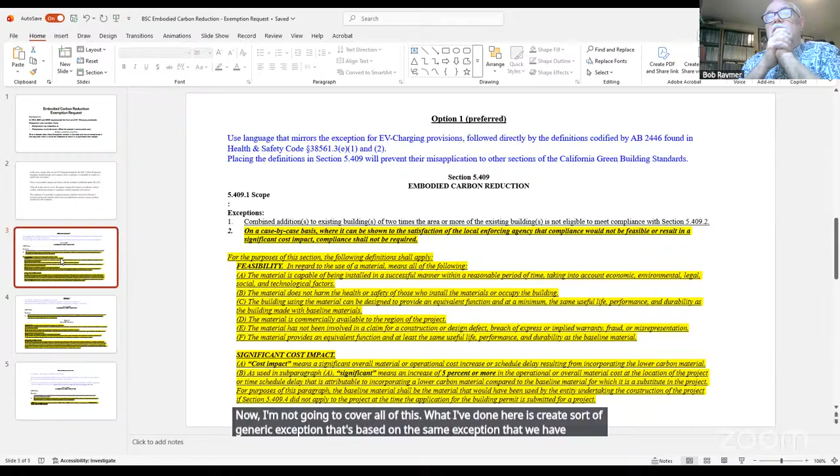Now, I'm not going to cover all of this. What I've done here is create a generic exception based on the same exception we have for EV charging, on a case-by-case basis, where it can be shown to the satisfaction of the local enforcing agency that compliance would not be feasible or would result in a significant cost impact. Compliance would not be required.

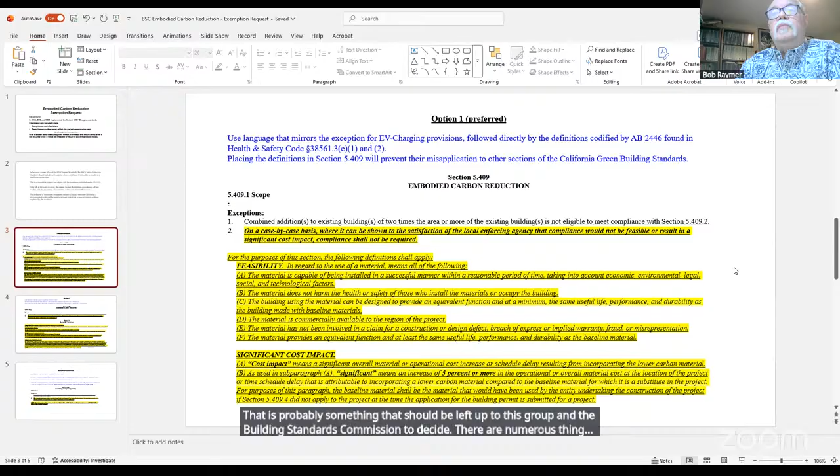In addition, I've added in this particular one the definitions out of AB 2446 for feasibility and for significant cost impact. I can tell you, as a longtime code user, these are ridiculously long definitions. I didn't want to take liberty with the content of AB 2446 - that's probably something that should be left up to this group and the Building Standards Commission to decide. There are numerous things here that could be consolidated, reduced, or worded differently, but I just wanted to present to the group, this is effectively the definitions out of 2446.

Now, in this option 1 that I've given, the benefit is that it has the definitions immediately following the exception. That way, these definitions can't be misinterpreted as applying to all of Cal Green. It applies to the embodied carbon reduction provisions.

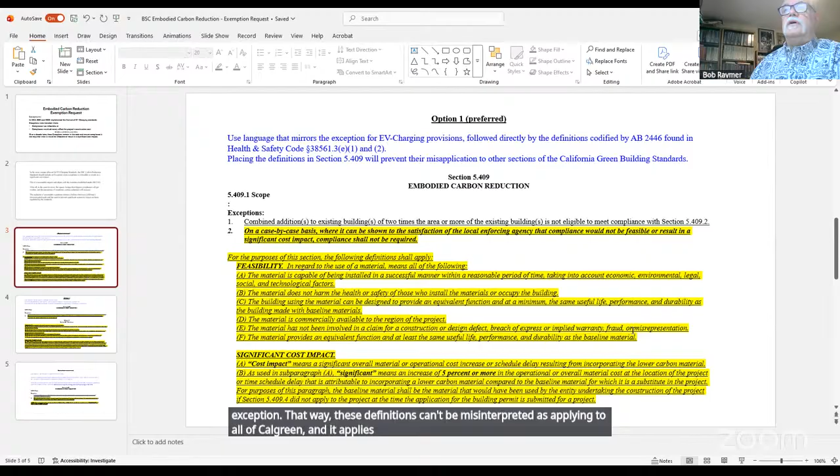Now, in the next one, option 2, which we would prefer less, we have the same language for the actual exception, but this time the definitions of feasibility and significant cost impact are placed in Chapter 2, Section 202, where we keep all the definitions. The downside of that is, once again, these could be misconstrued to apply to all sorts of stuff in Cal Green, not just the embodied carbon.

And lastly, the third option, which is absolutely the least preferred, we have the same exception language on a case-by-case basis, et cetera, et cetera. And then we have a note saying, for the purposes of this section, see Health and Safety Code, section 38561.3, E1 and E2, for the definitions of feasibility and significant cost impact.

While accurate, as a code user, it's horrible when the state tells you to go look at the public resources code, the water code, or in this case, the health and safety code. Building officials and code users don't carry the statutes around. But these are different options on how to deal with this.

Now, given the application of the EV charging standards, there's certainly going to be a lot of blowback on this. I'd like to state that the legislature and the governor wanted these agencies, the four that I mentioned earlier, to set up the framework for embodied carbon reduction, including a certified assessment of embodied carbon, a series of mandatory reductions in embodied carbon content over a reasonable period of time, to get the state to where it needs to be to meet its goals. And lastly, it included reasonable guardrails that I'm suggesting here that provide an exception when compliance was either infeasible or resulted in significant cost impact.

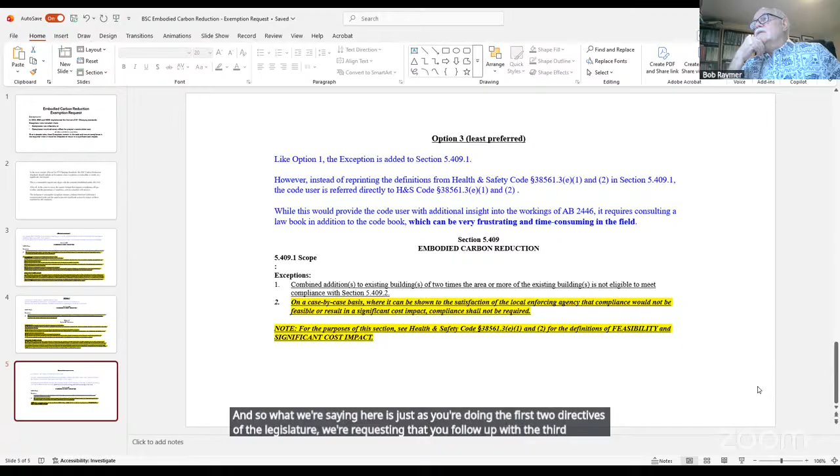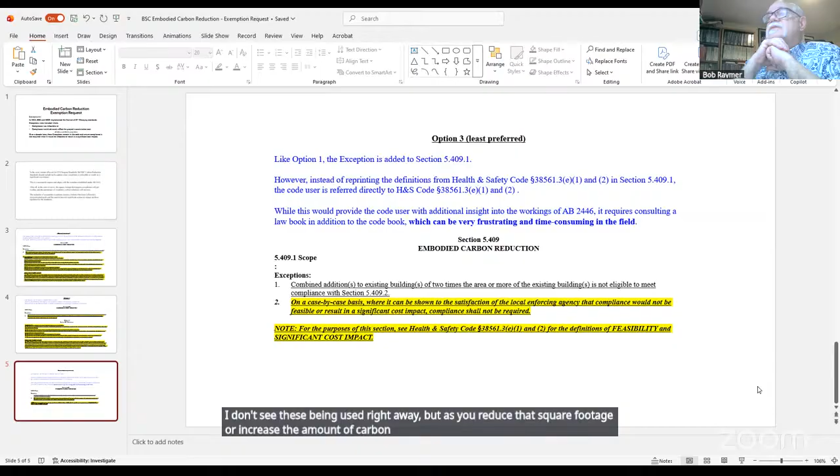In our view, if the BSC had adopted a regulation that only required a certified carbon assessment, but did not include a mandate to reduce the building's embodied carbon, numerous groups would have been rightfully upset. So what we're saying is, just as you're doing the first two directives of the legislature, we're requesting that you follow up with the third and set up some guardrails. Once again, if you maintain the square footage at 50,000 and the reduction at 10%, I don't see these being used right away. But as you reduce that square footage or increase the amount of carbon reduction, this is definitely going to play a role down the road. So with that, that's our request. Thank you.

Thank you, Bob. Speaking for BSC, we're not averse to the idea and we'll consider it, but we will need to further coordinate with you before the second CCRC workshop to come up with workable language. Yeah, absolutely. And like I said, I would not suggest using what we've got there. Those are very long definitions, and you could do the same thing with much shorter language. Thank you. Sure. Thank you, Bob.

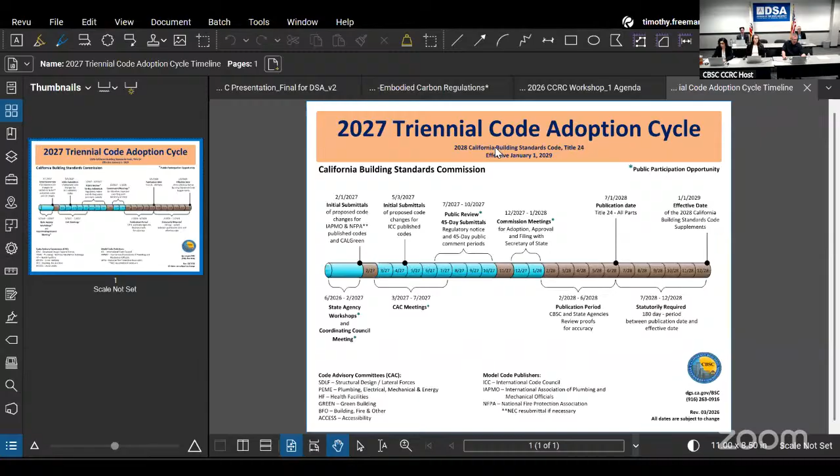I'm going to share a timeline infographic if I can. The fixed timeline is shown on the infographic being displayed. As you can see, Part 11 initial rulemaking documents are due to CBSC on February 1st, which means all the documentation has to be completed by mid-December at the latest. DSA and BSC need to route the documents through internal DGS review before the official submittal date.

What that means is that we need to provide data for the Form 399 and ISOR that were previously discussed before the second workshop. That's an action item for stakeholders. You've made your proposals for adjustments in some of these amendments, and we solicit your input on data for the ISOR and the fiscal and economic impact statement on the 399. Data about GWP limits to substantiate proposals to go closer to BCCA limits, cost, availability, ISO reasoning, etc. And the same about the carbon budget.

With that, if there's nothing else, we'll move to agenda item 9, which is adjourning the meeting. I do not see any hands raised.